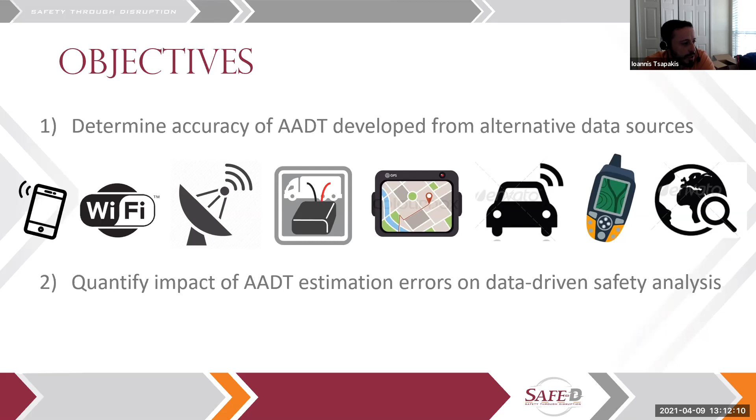The first one is to determine the accuracy of probe-based AADT estimates that I mentioned before that were given to us by StreetLight. And the second one is to determine what will happen to the results of safety analysis if someone overestimates or underestimates the AADT using these alternative data sources. So I'm going to start with the first one. I'm not going to spend too much time here.

So briefly, we gathered, processed, and integrated 4 types of data: roadway data separately for Texas and Virginia, crash data for a number of years, traffic count data that were provided to us by the 2 DOTs and include both permanent sites, but mainly short-term counts. Keep in mind that there are not that many permanent sites on the 3 lowest functional classes. And the 4th data set was 2017 AADT estimates that StreetLight developed using a combination of traffic data and other probe data from smartphones, GPS devices, and so on and so forth.

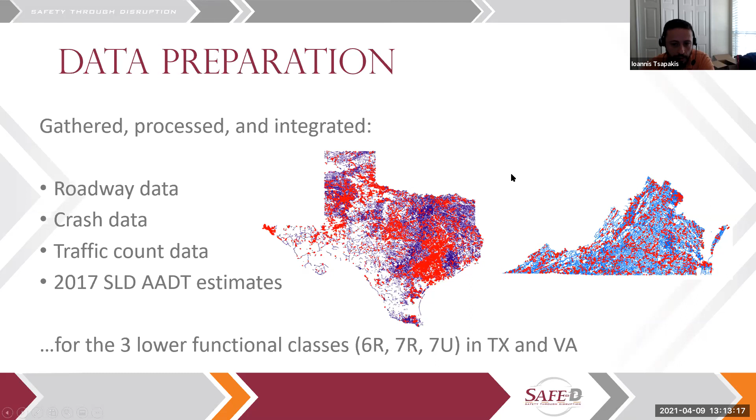So the analysis focused, as I mentioned before, on the 3 lower functional classes that you can see at the bottom of the slide for the 2 states. We have maps of the 2 states. So I'm going to dive directly into the results. We had to compare AADT estimates from StreetLight versus AADT estimates from the 2 DOTs. And I'm saying compare because when you have 2 estimates, you cannot really validate. You can just simply compare 2 estimates. You don't know which of the 2 estimates is closer to the true AADT value. And the AADT estimates from the 2 DOTs have been derived for the most part from annualized short-term counts.

So I'm not going to get into detail and explain each and every metric that we used. I'm just showing them here for completeness to show you that we considered many different measures. Maybe one of the most commonly used metrics that you might have seen is the MAPE. It's the mean absolute percent error. And that's relatively simple to understand, and many people use it in the traffic monitoring world. So that's essentially the difference between the estimated AADT and the observed AADT divided by the observed AADT, and the whole thing is expressed on a 100% scale.

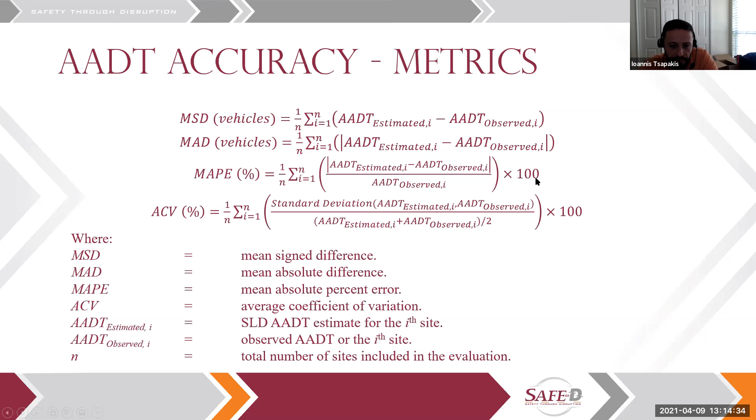So this is a summary table that shows the main results aggregated by volume group. So you see 5 volume groups here, starting with 0 through 399, medium volume groups, and then the high volume groups. When I say high, it is high for the 3 lower functional classes that typically don't have extreme volumes. They don't have volumes that you would find, let's say, on interstates or freeways. You will notice here, not available. The reason for that was back in 2017, StreetLight did not produce AADT estimates for roads that appeared to have an AADT of 400 or less. So for that volume group, we were not able to do the comparison, but we were able to do it for all the other 4 groups.

So in general, the 2 key findings are that the roads that have an AADT of 2,000 vehicles or more have a median absolute percent error of about 25%, and higher errors were observed for roads that have between 400 and 2,000 vehicles. I would like to note, though, that StreetLight has made significant improvements over time, and we've seen these kinds of improvements in the accuracy of their estimates in many different projects, including an ongoing pooled fund study that is extremely exhaustive and comprehensive and does pretty much what we did, but for a number of states and for a number of benchmark sites.

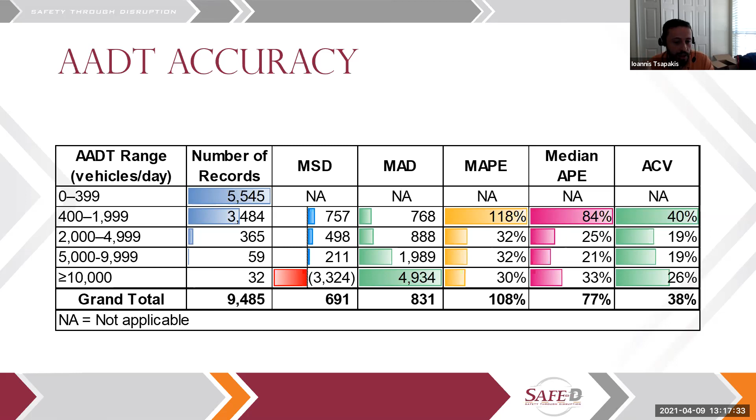There are a few studies that deal with AADT accuracy, but there are not that many studies that have done the safety impact analysis that Subhasish and Ali did. So with that said, I'm going to turn over to Subhasish, who's going to talk about the SPFs that he developed for Texas. And then Ali is going to talk about the SPFs that he developed for Virginia. Note that Subhasish and Ali used different methods for the SPFs that they developed in the 2 states. So Subhasish? Yes. Hey, this is Subhasish.

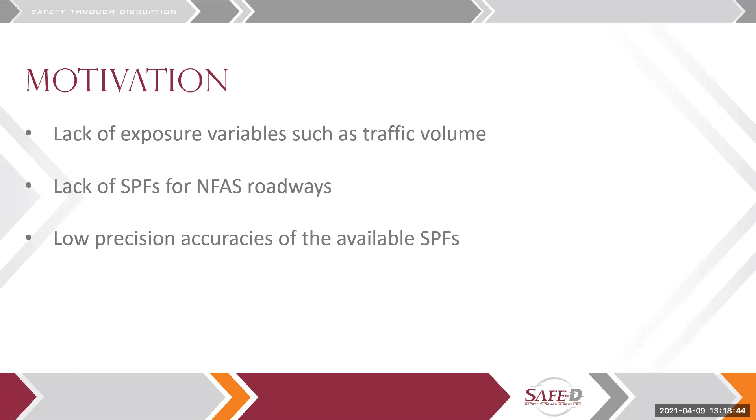In the next few slides, I will explain the safety performance function we developed for Texas. So here's the motivation of the safety analysis we conducted in this study. Yanni already explained the overall objectives and motivation for this project. So for the safety analysis, we find that in many low volume or NFAS roadways, traffic volume data are not available. So that is one of the critical gaps. And we also found that very few SPFs have been developed for low volume roadways or NFAS roadways. And another critical issue is the preciseness of the SPFs. And we also found low precision accuracies in the available SPFs.

So here's the overall contribution conducted for Texas data. We developed SPFs for rural minor collector 2-lane roadways for 3 severity groups. We developed it for total crashes or KABCO crashes, KABC crashes, and KAB crashes. For those who are not familiar with the KABCO scale, KABCO is 5 different severity levels of injury: K for fatal, A for incapacitating injury, B for non-incapacitating injuries, C for minor injury, and O for property damage only or no injuries. So we developed models for 3 groups.

KABCO is total, and KABC, that is also known as fatal and injury crashes in the Highway Safety Manual. And also we developed a model for KAB crashes, that is fatal and serious injuries. And one thing that is unique in this particular study is that to improve the precision accuracies, we applied decision rules to see the cluster effect in the data and to see how the overall safety performance function will be improved by developing models based on the decision rule results.

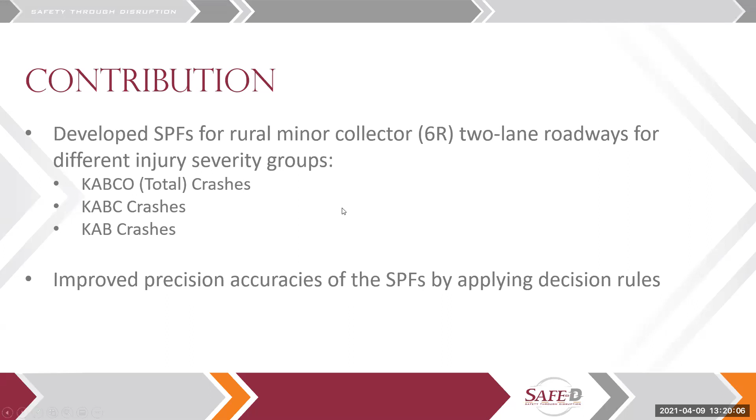So what is SPF? I think those who are familiar with the Highway Safety Manual are familiar with safety performance functions. It is an equation in the following format, derived from a negative binomial model, and it predicts mean crash frequency for a particular temporal duration, with a set of variables that can be considered as a function of geometric and traffic characteristics. For example, this general model shows that the predicted crash is a function of traffic volume or AADT and segment length.

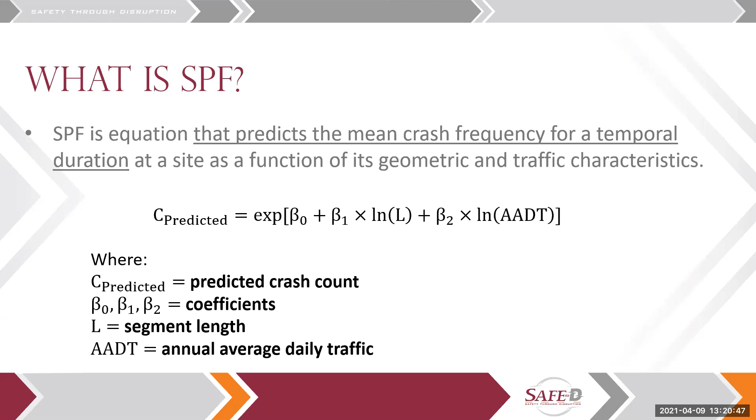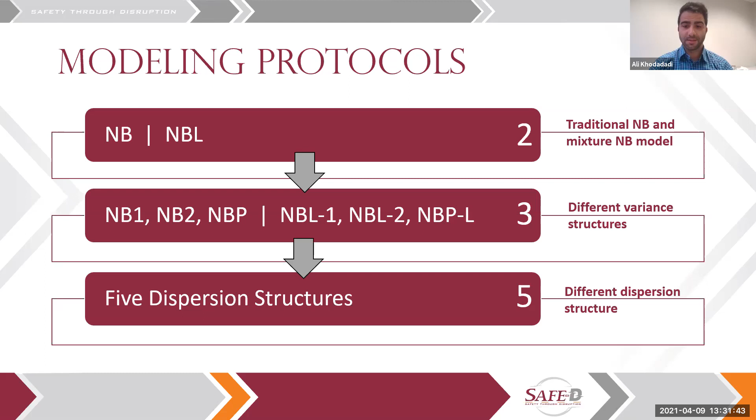I'm going to give you a short brief on our modeling protocols. In the first level, we examined two different distributions: the traditional negative binomial distribution and a mixture distribution, negative binomial Lindley. In the next level, we tried three different variance structures, and then we applied 5 different dispersion structures in the last level. So in total, we developed 30 models and applied them on the Virginia data set. In the next slide, I'm going to go over the results.

Results also show that even within each family, the dispersion structure choice and the variance structure choice can considerably affect the performance measures. For example, negative binomial Lindley models favored less flexible variance structures, while traditional negative binomial models favored more flexible variance structures. These results indicate that to get more accurate and reliable estimates, we need to switch from the traditional models used in the literature to new advanced models like negative binomial Lindley, with a reasonable choice of dispersion and variance structures.

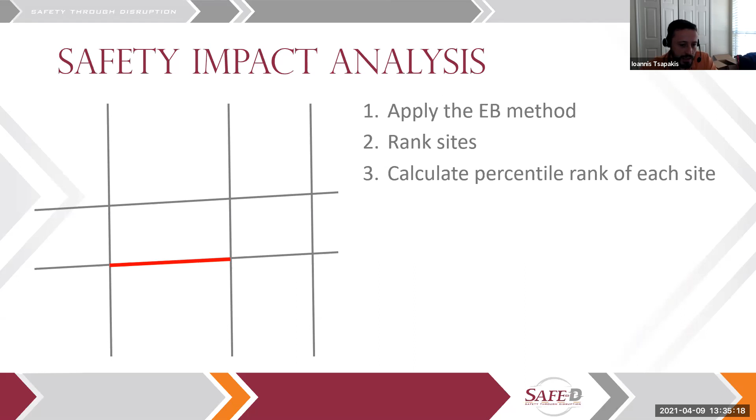So after we did that, we calculated an expected number of crashes for every single segment. And based on that, we ranked the sites. And after ranking the sites, we calculated the percentile rank of each site. And that's when the sensitivity analysis started. So we focused at each link separately. So let's assume the red link that is shown right there.

For that link, we increased its AADT by X%, starting with 10%. After we increased that, we repeated steps 1, 2, and 3 for that site. Then we moved on to the next link. We increased its AADT by 10%. We repeated steps 1 through 3 until the entire network was scanned.

For Texas, Subhasish is gonna explain this chart, and Ali is gonna explain the corresponding results that he produced for Virginia. Subhasish? Hey. Hello, yeah, here I am again.

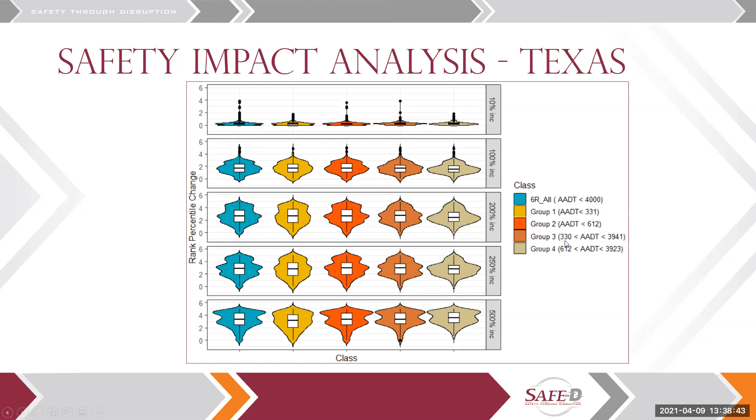So it definitely indicates that the change of ADT impacts the safety analysis, and these plots give a visual representation of that impact analysis. So in the next slide, Ali can explain the safety impact analysis he did.

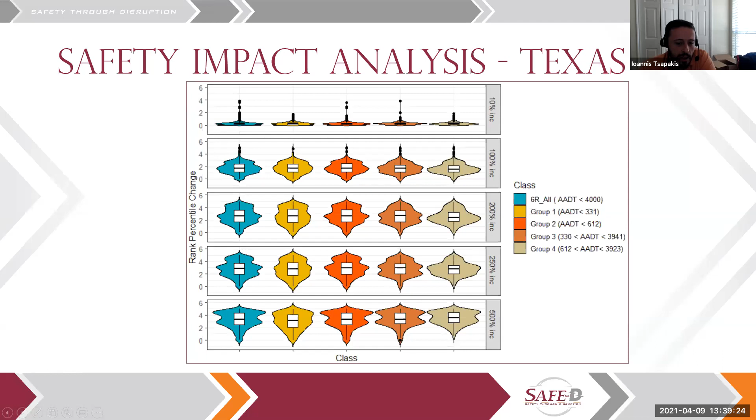I would like to make just one comment here, is that in general, the impact that you observed in Texas was not as significant as Ali will explain in the case of Virginia. So for example, by increasing the ADT from 10 all the way up to 500%, the segments were ranked higher from a little bit above 0 all the way up to 4%. So that's not a significant impact, but the picture is entirely different in the case of Virginia. So Ali, would you mind describing the results?

Yeah, for sure. We did the safety impact analysis for Virginia as well, in the exact same way Subhasish mentioned before. And actually, we observed the same pattern, not to the exact same extent: as we changed the AADT to higher extents, the rank percentile for the expected crash values changed more rigorously.

But the extent of the change in rank percentile for the Virginia data set was significantly higher than for the Texas data set, probably due to two reasons. First of all, we used negative binomial Lindley for the Virginia data set, and negative binomial Lindley models tend to be more flexible and more complex because they have more degrees of freedom, and more degrees of freedom means more variance. So there's a trade-off between the bias and variance.

We're going to get more accurate results. We're going to get less bias. So the variance automatically would go up, and that's one of the reasons that we observed more variance and more change in rank percentile when we change AADT values.

The other possible reason for these results could be the fact that in the Virginia data set, we were dealing with around 3,000 roadways. But in the Texas data set, we're dealing with around 400,000 roadways for all the low volume classifications. And that could be another reason: as the total number of roadways is lower, the relative rank percentile change is going to be higher compared to that of the Texas data set.

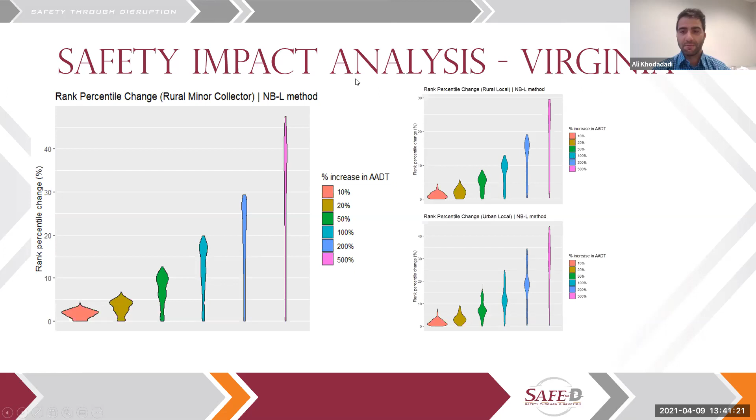So we reached our conclusion. With regards to AADT, as you saw in the previous slides, the AADT accuracy improves as we transition from low volume roads to high volume roads. The median absolute percent error for roads with AADT greater than 2,000 vehicles per day is about 25%. But as I explained before, we used 2017 AADT estimates.

Since then, StreetLight has made a lot of improvements, and we've seen significantly lower errors from ongoing projects that have similar objectives. And one more takeaway is that StreetLight now is able to develop AADT estimates for low volume roads that appear to have an AADT between 0 to 400. When we started this project, that was not an option back then.

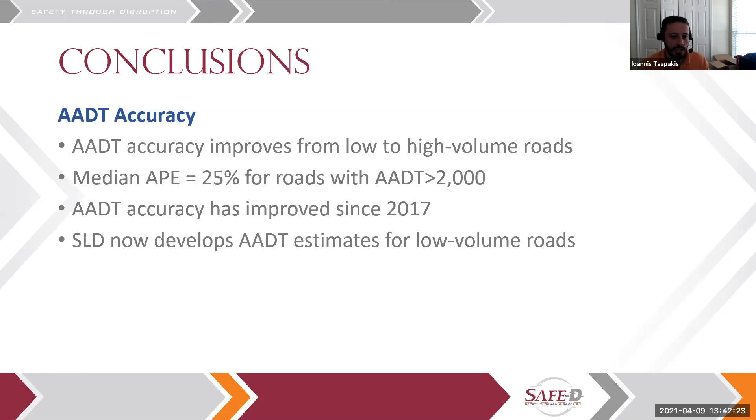And in regards to SPFs, we observed that rule-based SPFs perform better than the traditional SPFs. Also, the negative binomial Lindley models outperform the traditional negative binomial models. In other words, these results are saying that we need to switch from traditional models and try new advanced models developed lately specifically for a particular situation. For example, dedicated SPFs for non-federal aid system roadways.

Also, we concluded that the choice of the dispersion and variance structures matters both in negative binomial and negative binomial Lindley distribution. In regards to safety impact analysis, we concluded that negative binomial Lindley models tend to be more sensitive to AADT accuracy due to that trade-off between the bias and variance I mentioned. Also, the impact of AADT inaccuracies on network screening results depends on the AADT coefficient of the SPF, the overdispersion parameter, and the sample size of the network. So I think this concludes our presentation.

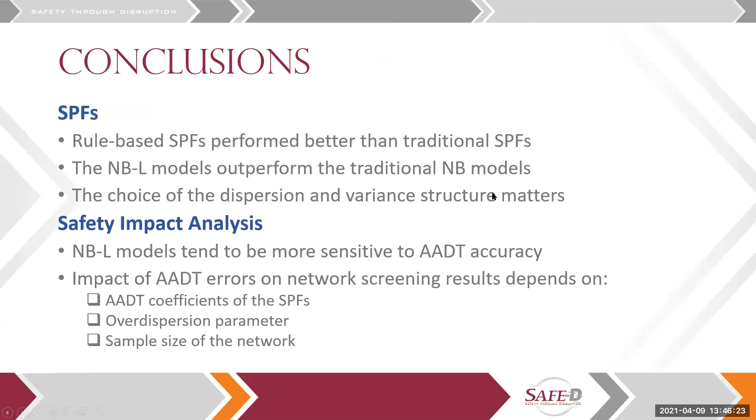Yes, I can explain it. Yanni, if you can go back to the safety impact analysis steps. So we take a look at the AADT increase for 10%, 50%, 100%, 250%, 500%, but the ranks are based on expected crashes. In the EB method, expected crash is the weighted factor times the predicted value plus 1 minus the weighted factor times the observed crashes. So we take the expected crash and re-rank, not the predicted crash. That part we can also do, but we focus more on expected crash because that's what engineers use to get the expected number of crashes for safety performance analysis.

Mohammed, did I answer it correctly? When you do this comparison for several sites in a network, this type of analysis is more useful for, say, the screening step of the analysis, network analysis. But when you want to, for example, do a safety analysis on a specific project or a specific segment, then this analysis is not useful there.

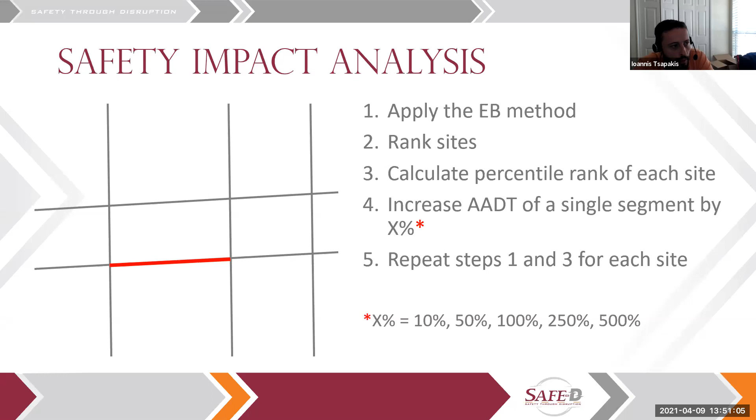Yes, I think Ali alluded to that. Ali, would you mind answering the question? Yeah. About the excess zero problem that you described before? From previous research, some of the research recommends zero-inflated Poisson and negative binomial. So actually in the Virginia case, I have been working for Virginia, a lot of secondary roads in rural areas have zero crashes for the last 5 years or 10 years.

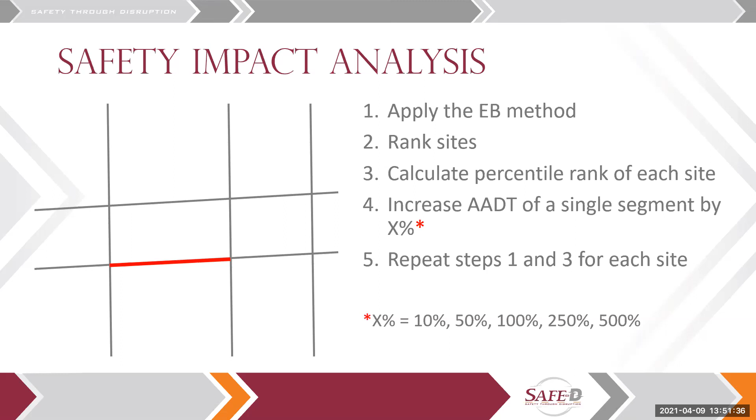So when we developed the traditional SPF, that was one of the concerns and issues. So any thoughts on this? Sorry, I barely understand the question. Can you repeat it, Yanni?

So I think if I understood it correctly, when Dr. Lim developed SPFs for rural roads in Virginia, he had a challenge of dealing with a lot of zero crashes. Essentially, a lot of segments did not have any crash. So the challenge is, how do you deal with these zero crashes in so many segments? I'm going back to the slide where you briefly described how to deal with these excess zeros. Would you mind elaborating a little more on that?

Yeah, it's a very good question. Actually, it's all about the flexibility of our model, the ability of our model to capture the variation in the data set. As I was saying, negative binomial cannot capture this high dispersion in the data set because data sets containing a lot of zeros tend to be highly skewed or have a long, heavy tail that traditional models cannot deal with.

So I try to empower the underlying negative binomial distribution, to point out those features that could be beneficial for making this distribution more flexible. For example, in the next slides, I was talking about changing the dispersion and variance structures. We can improve the model to deal with those excess zeros by changing its variance and dispersion structure.

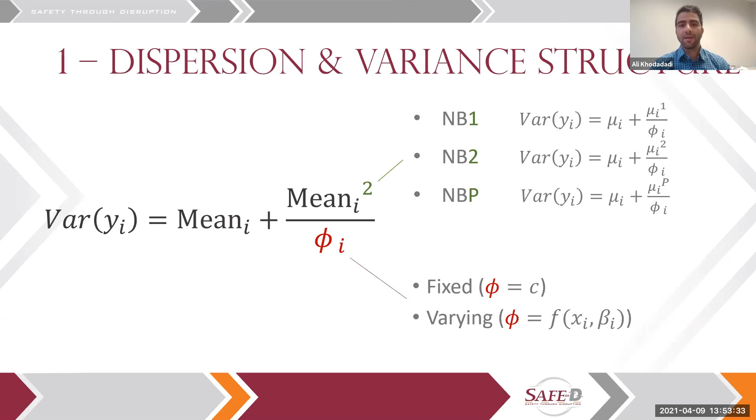Because as I was saying before, it's all about the flexibility. It's all about the ability of the model to capture that variation. And also in the next slide, I proposed using a mixture distribution instead of the negative binomial distribution.

If you can tell me what kind of SPF model you used for the Virginia data set, I can tell you why you had such a problem with a lot of zeros in the data set. But in general, when we're dealing with data sets with a lot of zeros, negative binomial Lindley models have proved to perform significantly better than the naive negative binomial distribution that most people use in SPF development for other classifications, not only non-federal aid system roadway classifications.

All right, thanks for your answer. Yeah, we applied the traditional negative binomial when we developed the SPF, the safety performance function, especially for the rural two-lane roadways, including a lot of secondary roads with low AADT. So we had some challenges when we developed the SPF at the time.

Yeah. Thanks for your answer. And then, of course, no problem.

Yeah, actually, collecting information is a big challenge. We actually faced this challenge as well in these projects. We had to deal with unavailable traffic information for so many roadways. We needed to collect it from different sources and combine them together to make a complete data set that we could develop SPFs based on. So yeah, I totally understand your concerns, and that's actually one of the problems that we faced in this project as well. Thank you.